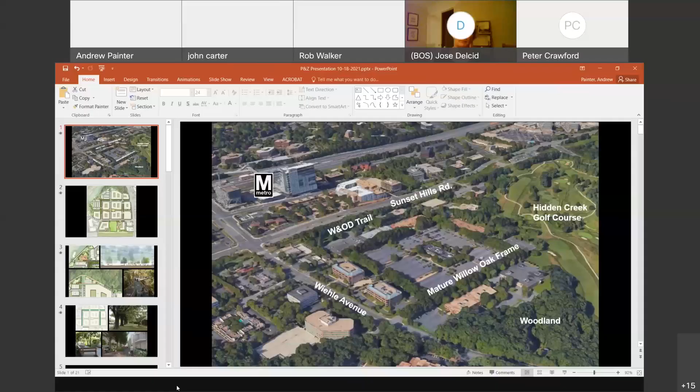Yes, okay, so I won't belabor the point, just sort of how we got to where we are - everyone knows that we went through rezoning back in 2019 for 32 acres of Isaac Newton Square, and the idea was to redevelop it with a series of 10 pedestrian-friendly development blocks, all in line with the comprehensive plan's recommendations. We only processed the rezoning and conceptual development plan with the ownership thinking at the time that we would eventually realize the conceptual vision over time as market conditions dictated.

With each block, you would get separate final development plans that would be filed for each block and building, and that would be reviewed by this body as well as the county.

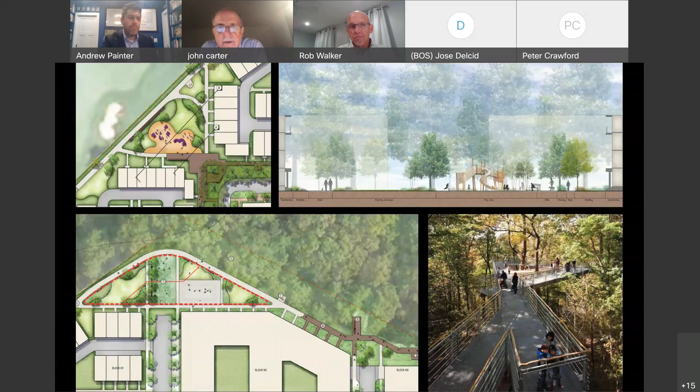When we first started designing out the neighborhood, we let the open space and the comprehensive plan's grid network guide the layout. It wasn't driven by buildings, it was really driven by open spaces. So you see the grid, the development blocks, the open space, and the idea really was how do you bring people together to socialize and interact?

How do you provide a framework around the preservation of those mature willow oak trees that are supposed to be preserved, and then provide opportunities for each block to have direct access to nature in a site today that is completely paved. So we have Nature's Edge Park, which goes around the upper part of the property.

We have the rain garden meander, which slices through the middle of it, meant to be a place for stormwater management. We have the athletic field at the bottom, and we also have a connection we worked out with Nova Parks and the Park Authority to punch through to the W&OD trail so people can get through to Metro Rail as well.

Tying all of this together was the idea of the Willow Oak Park, a variable width park activated with nodes of public art and furniture, and of course the preservation of the willow oaks. They are the defining feature of this development.

We've identified most of them for preservation on all of our landscape plans. In most places we are holding the existing building zone and curb line, and in some cases we're moving it away substantially, almost 8 feet in some cases, away from those willow oaks.

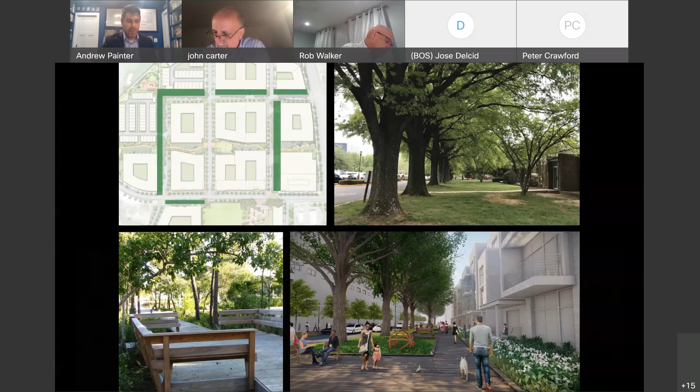As I'll mention in a second, the ownership has engaged a reputable arborist. They've been monitoring and maintaining those willow oaks for the last 2 years and stabilizing them. We have a series of proffers that seek the preservation of those trees.

Just for recollection, this is the tree preservation plan for the identification of the trees to be preserved from our rezoning and conceptual development plan. Some of you might remember that.

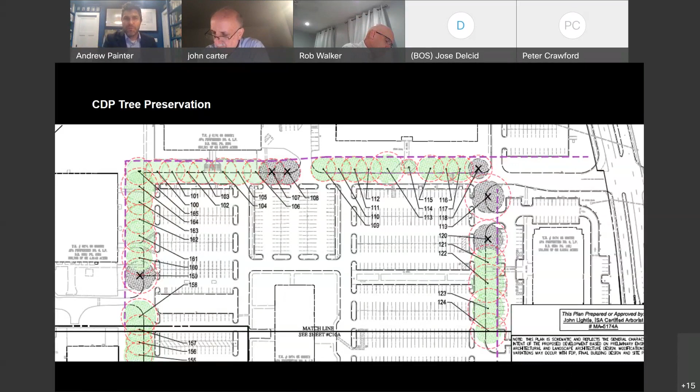When we looked at how we could move forward with the first phase of the project, we really wanted to do it in a way that would establish Isaac Newton Square as a place, as a neighborhood, not just a one-off block here or a couple homes. We wanted a catalyst project with a critical set of blocks to really create a semblance of place.

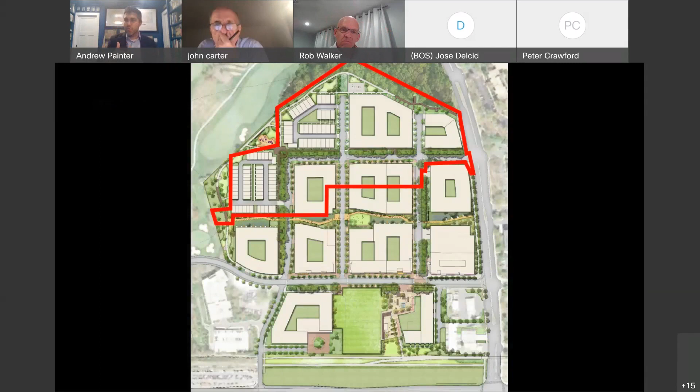And we determined that we would start at the top and then work our way down towards the Metro Rail. So we really focused on these 4 blocks, W2, N1, N2, and N3.

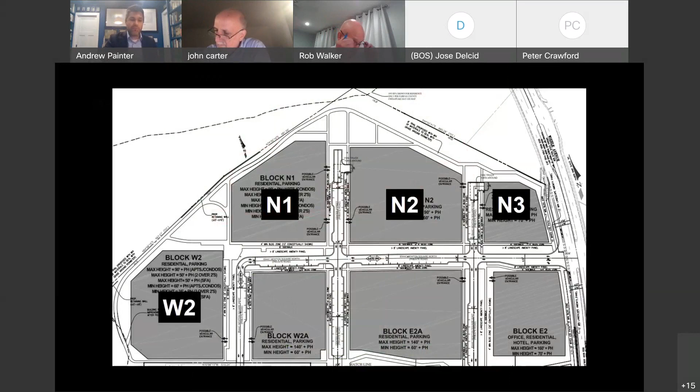But to ready those blocks for vertical construction, and to define those blocks and provide physical access to them, we realized that the private streets first had to be constructed and placed in common ownership. And then over time, vertical construction would occur in each of the blocks.

So what is before the committee this evening is an FDP to construct that first section of streets. No buildings are proposed. We are dealing with stormwater management, roads, and curbs. But these seemingly innocuous improvements are absolutely critical to accelerate the delivery of this neighborhood.

I will say that looks can be deceiving here. There's a lot to it. It's not just the roads, but it's critically important.

When we met with you last month and followed on with discussions with staff and Commissioner Carter, we realized there was some tweaking to do on the FDP drawings and in the conditions related to sidewalks and utility placement and more. I'll be the first to admit, and I wasn't here last month, but I will say this.

I think we did not anticipate the level of questioning at last month's P&Z meeting, especially because the utilities and that level of detail and scrutiny will be determined at time of site plan and not necessarily at the FDP level. That's really where it needs to be shown, in the site plan.

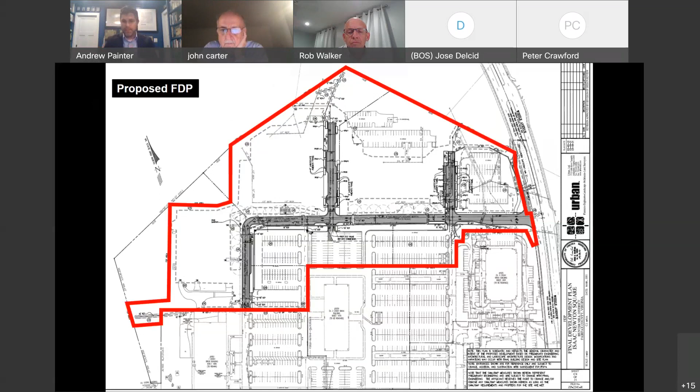But we do apologize. All the things that were brought up, they're in the works now. And frankly, some of the comments we received from this group really caused us to stop, pause, think, and rework our approach. So what I wanted to do is just highlight 3 additional points that Commissioner Carter had alluded to.

The first question, or one of the big things that came up last time, there may have been a misunderstanding about whether the proposed FDP aligns with the approved CDP, which was approved by both the Board of Supervisors and by this committee. So to confirm, the proposed road and infrastructure improvements shown here are consistent with what was shown on the approved CDP.

Those lines are coterminous. There is one small curb alignment, a small deviation in the curb return by Wiehle Avenue, but if you're looking for a deviation between the CDP and the proposed FDP, there really is none. We're also pulling back, and you can see it on the western side as you approach Isaac Newton Square West, on the left-hand side of the screen. We are pulling back almost 8 feet or so, the curb away from the existing curb line, which is shown in green.

Pete Crawford is our civil engineer with Urban. Pete, are you on the phone by any chance? I'm here, Andrew. Did I summarize that succinctly? Yes.

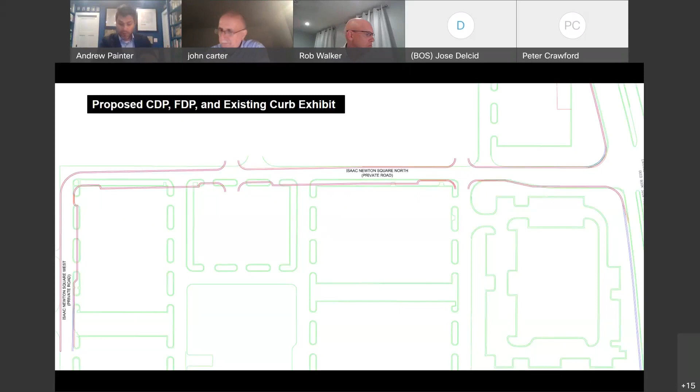Okay, thank you, Pete. The second point I wanted to talk about, and it's critically important, is tree preservation. Commissioner Carter had started talking about it, but as we mentioned, a significant feature of the rezoning plan, and a lot of justification for it, was based on the preservation of the mature willow oak trees and their inclusion in our landscaping and open space plans for future development. We all agree that the willow oaks are a major asset of the project, and they're important to take care of.

In fact, the ownership, Peter Lawrence Companies, actually developed those two office buildings along Wiehle Avenue, opposite the Taco Bell and the McDonald's, and they did not lose a single willow oak tree along Isaac Newton Square East, which is where my cursor is here. It's really for this reason that the rezoning included fairly lengthy commitments for the preservation of those, and we called them out on our CDP.

Since appearing before you last month, we've made some changes, and we wanted to provide some clarifying points. First, to confirm, we have, in fact, been working with an arborist, Care of Trees, which is affiliated with the Davey Tree Company, for the last two years. Davey has been monitoring and maintaining those willow oaks. They've been preparing those trees for construction to make sure they can weather it to the degree possible.

They've selectively pruned dead branches and used other techniques, and we're going to be working with them in the future to assess, using radar and other methods, their critical root zones. In terms of how we're going to preserve them, that's the level of detail we're working on. We know it will most certainly involve urban forestry and park authority staff, but that will also be addressed in greater detail at time of site plan. I wanted to let you know that we are taking that seriously and have engaged with the arborist.

The second thing we did was remove a note on sheet C17, which provided the authority for the applicant to remove trees almost indiscriminately. That's an offensive note, and it has been removed. The third thing we did was work with staff to craft two development conditions that Commissioner Carter had mentioned, one of which reiterates and carries forward the tree preservation commitments that we made in our proffers.

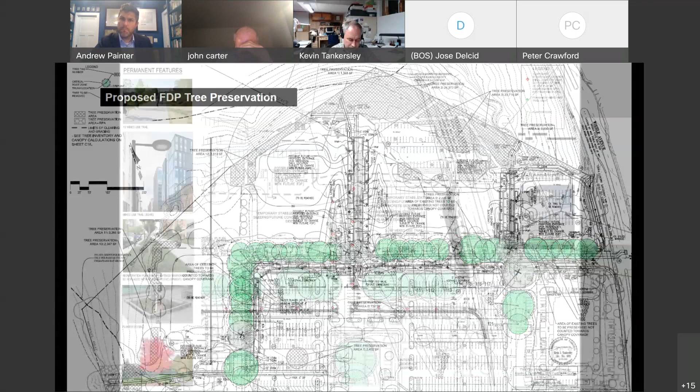In terms of some of the things that were looked at and are being done to minimize disturbance to the trees, for instance on the first segment from Wiehle Avenue to Isaac Newton Square East, we are going to leave in place the existing pavement and not have any disturbance there at the outset of work.

The next area, along Isaac Newton Square North between the east and center streets, we have pulled the limits back, down the slope. They're approximately 45 feet away from the trees. Next slide, Andrew, please.

Moving along from Center Street to Isaac Newton Square West, that's the area where, as I mentioned, we're pulling the curb away on the street side, which will open up more rooting area on that side. We do have a retaining wall on the north side of the trees, so the limits of clearing is only approximately 25 feet, but that retaining wall is containing the roots of those trees. They don't go any further than that, I'm pretty sure.

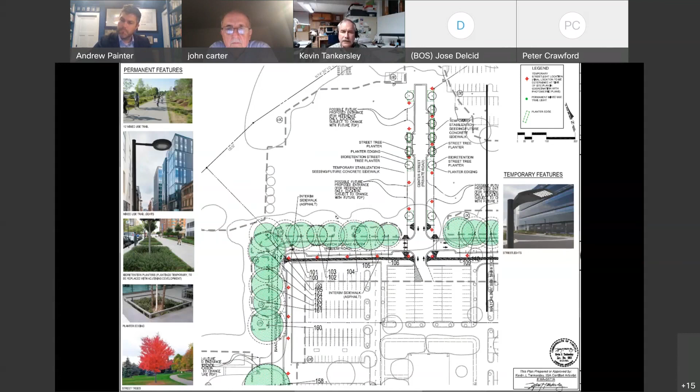And then along Isaac Newton Square West, we've also pushed the limits back to approximately 35 feet. Andrew, if we could have the next slide, please.

So we have a lot of work to do. We are getting into the nuts and bolts of preparing a tree preservation plan for the public improvement plan that will eventually be submitted. Our proffers require us to prepare that. It's going to have to be a very detailed plan because there is a lot here. This is a very complex project.

And in order to help with that, the applicant has brought on a second arborist, Carrie Halsey with Davey Tree, who also has significant experience, especially in dealing with mature trees like this in delicate situations. Davey is going to be doing some ground penetrating radar to help us trace the critical root zones better for the existing trees. We haven't gotten that work done yet, but that will help inform the plan and give us clues as to areas that we really need to pay extra special attention to.

In addition, we are continuing to work on care programs for these trees leading up to construction. This is stuff that will not be part of the actual construction plan because it's going to happen before then, to make sure these trees are in the best condition going into construction. A tree that's stressed doesn't survive construction very well, so we want to make sure these are in good health.

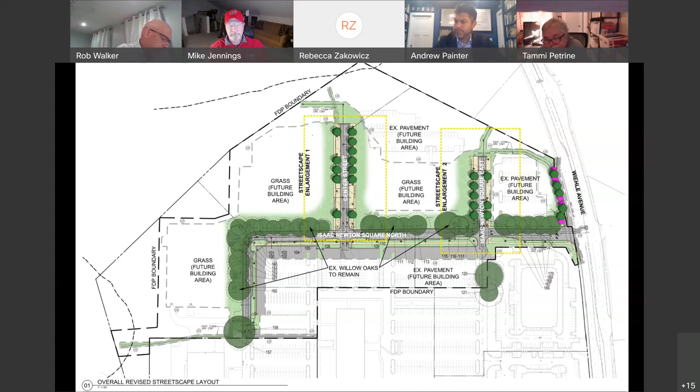Thank you, Mike. Michelle? I'm good too. Thank you very much for addressing our concerns.

Certainly. And then Matt. Thank you, everybody. Unfortunately, I couldn't make the meeting last month, so I didn't get to hear the initial discussion, but I thought the presentation tonight was extremely detailed, and it sounds like everybody's doing their due diligence to really acknowledge and protect these trees. So I have nothing further to add.

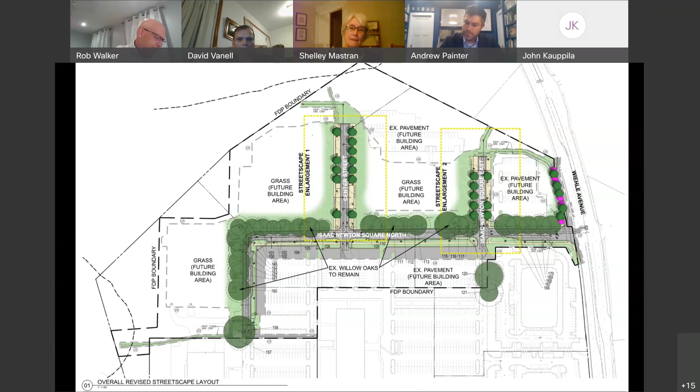Okay, thanks, Rob. A couple things. First of all, I'd like to second Mr. Pagay's suggestion for the roofing on these buildings when you get around to building them. It sounds like an excellent idea and energy efficient.

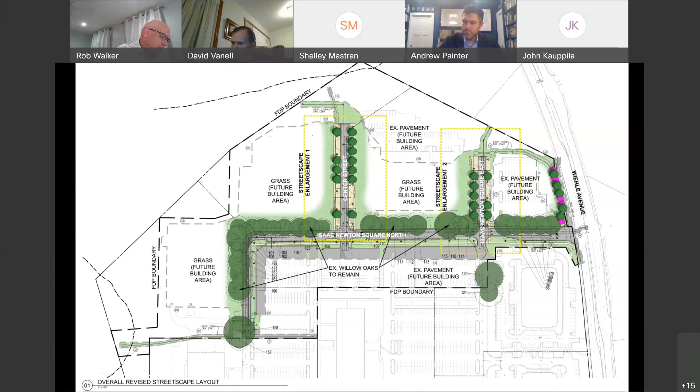What is your review for me again, the commitment for the recreational amenities? I know you have a sports field down in the bottom center of that. Dimensions of that are what? You know, I have to take a look at those proffers again, but it's a full-size adult athletic field.

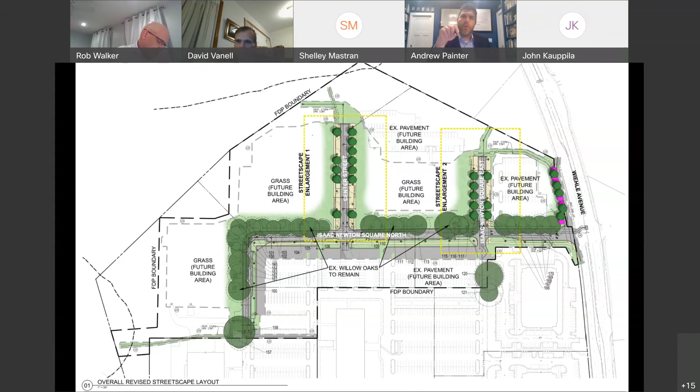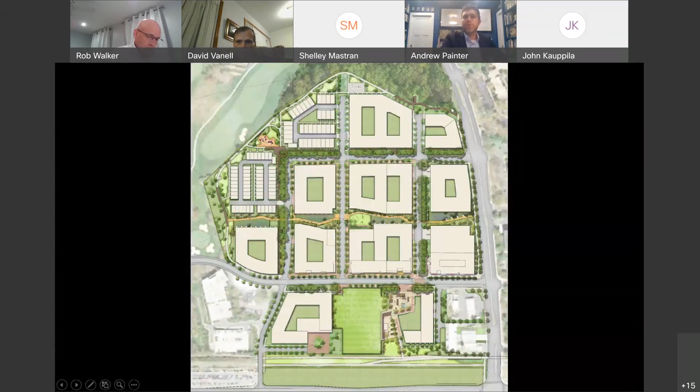Okay, and then you've got some amenities up at the very peak of the site. We do, yeah. So the main amenities that are up at the top, if you're living in this northern part, one is going to be the Nature's Edge Park, which is in this area, wrapped around this whole area. That'll be pathways, floating decks, that sort of thing. In this area here, there's going to be a small tot lot, playground, that sort of thing. We purposely located it here to take advantage of the views of Hidden Creek Golf Course.

And then in the northern part here, we've got an option for sort of a small court or dog walk area. And then you can see the Willow Oak Park here, around the vicinity of the site. Midway through the site, slashing through these blocks, is what we are calling the rain garden meander. The idea is that the buildings on those would direct some of their storm water into that area, and that can be an educational type facility.

And then down at the very bottom, this is where we don't have much retail on the site, but this is where we're hoping to have retail and some commercial uses, sort of Main Street Village kind of feel. This is where we've located the full-size athletic field, with a warm-up field to the west of it, and it's got bathrooms, sort of amphitheater seating, and a main plaza area along here. There's a pavilion, and in the meander there's also a little community grass green area.

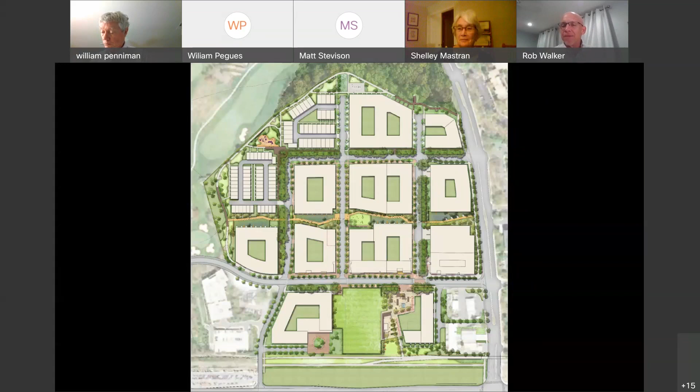Okay, so that's unanimous except for me, as I'm abstaining. So that motion carries. Congratulations to the applicant. Thank you again for working with Commissioner Carter and working with us. We really appreciate your efforts and your team's efforts. This has always been an exciting project for the community, the way it's being preserved, the tree save. We all want this to be a success, and I think you've all proved tonight you feel the same way. You always have, quite frankly, but we really look forward to it.

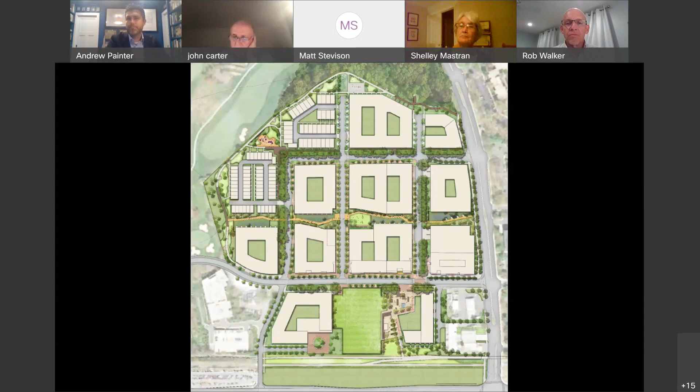Thanks, Rob, and thank you all. How many people voted, Rob? I'm just curious. Let's see, 1, 2, 3, 4, 5, 6. So we have 11 voted for approval and 1 abstained. Thank you.

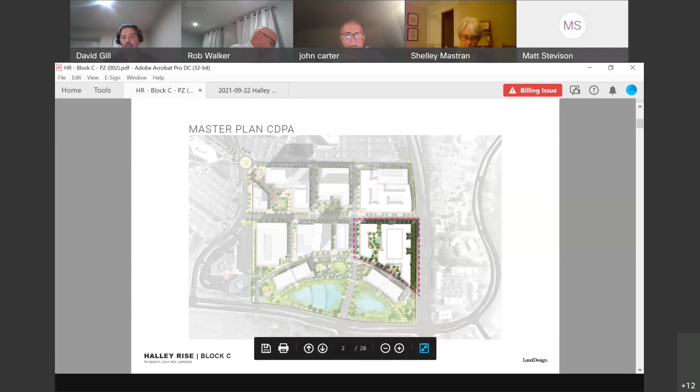To the south would be the existing Fannie Mae office building. East is Reston Parkway. To the north is where the Wegmans that is currently under construction and nearing completion is at right now. Just zooming in again, we were talking about two buildings, two residential buildings, and we'll go through that as we show it to you.

The key to it was that we had brought the existing office, the existing parking structure that was designed to serve the office off-site, into the building itself and fully wrapped it. That's a pretty significant change from where we were with the CDP and committed to this design with the FDP.

This building on the east is intended to be a rental building. Right now, we're anticipating this building would be ownership on the west, but you never know how the market actually turns out in 2 years from now.

I'd also point out here to the west of that, this building here is the CLT office building. I think Commissioner Carter wanted me to highlight that last time. That is actually a building which is called cross-laminated timber, a wooden structure for an office building.

The big advantages of a CLT building is that it allows for better carbon sequestration because it's actually captured in the wood rather than the carbon that you need to make steel or concrete. Estimates, and Bill Penniman probably knows this better than me, are that construction alone is responsible for 10% of carbon emissions worldwide. So the ability under the new building codes to do CLT buildings above 4 stories is a really exciting improvement. It's a credit to Brookfield that they're willing to commit to do that for that office building. I think that's a green feature that you asked me to touch a little bit on, Commissioner Carter.

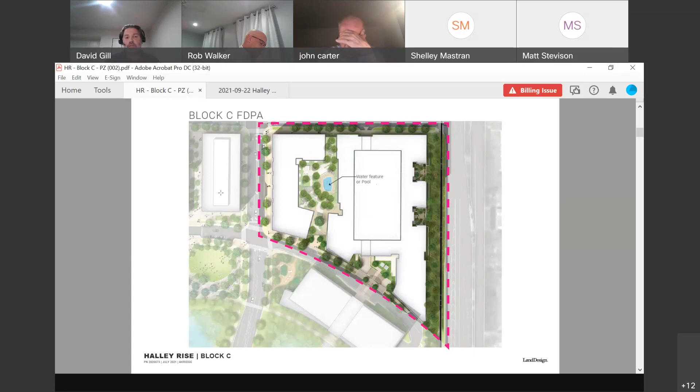Just going through it a little bit more, we had a couple of questions here about the pictures here, I think you raised that, Tammy. Talking with our landscape architect, these represent 3 to 5 years after planting. All of the trees planted will be either 3 to 5 inches in caliper when planted, and as shown here, they're 3 to 5 inches. In the plan itself, they are shown with the 10-year canopy as required by the ordinance, but I want to make sure everyone understood what the graphics were when they were looking at this.

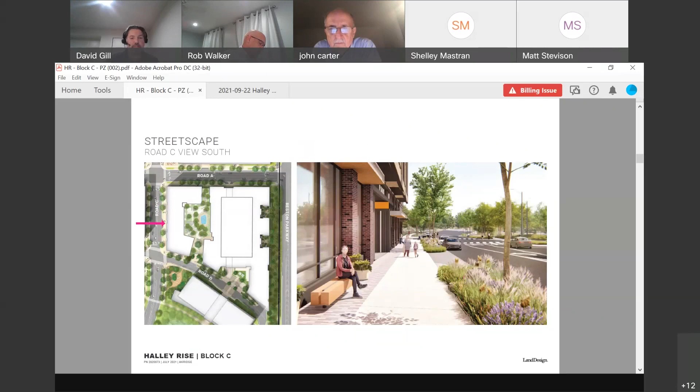This again shows different street views. I'm happy to spend any amount of time on these different views, but none of these have changed from the last time we presented to you. This is looking from the park northeast.

So Wegmans would be in the far background here. And we've got more detail on some of the surrounding parks. I think it was a question we had heard is where are the parks in relation to these residences? I've got some slides further on to talk specifically about those.

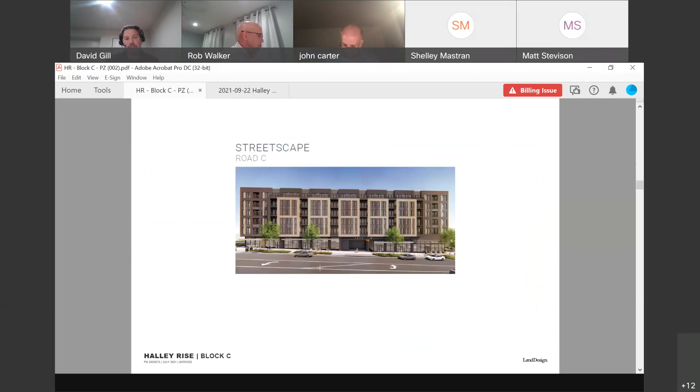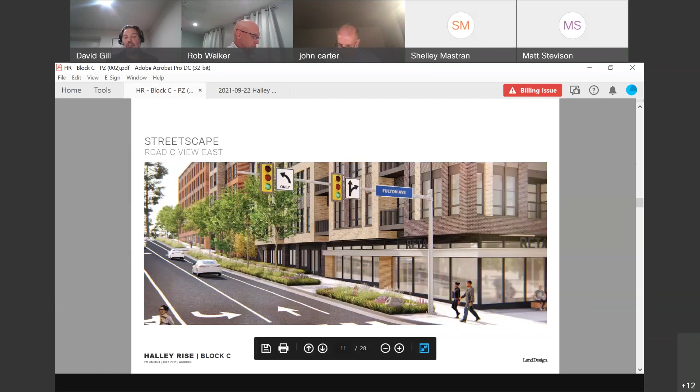Again, how the frontages work, how it works with the street as it goes down with the grade. Up to the left-hand side of the picture is Reston Parkway, and it would fall down almost 2 stories, 20 feet as you come down to this corner. Wegmans would be across the street in this location, but again, we're anchoring with retail, trying to activate this street frontage as much as possible and make it as pedestrian friendly.

One of the questions we had heard was the type and species of trees. The proffer commits us to use native species to the maximum extent practicable, and we're absolutely supportive of that. I don't think we can commit to 100% native just because there are some better climate adapted non-native species, but we're 100% committed to trying to use natives where we can, and absolutely no invasive species. We are not anticipating river birch here, I think there was a question about that, largely because our understanding is that doesn't comply with some of the Reston streetscape standards, and working with our landscape architect, that's what we've been targeting here.

I'd also use this chance to talk a little bit about the raised plaza that's basically a story up between the 2 residential buildings. There were a couple questions about the amount of green roof we're talking about. Working back through our team, it looks like we could commit to about 4,000 square feet, or 15% of that, as green roof, and we're excited about that. That goes above and beyond any commitments in the proffers currently, or that were frankly done on the FDPs for the other blocks. So we're excited about being able to make that commitment. We really sharpened our pencils to see what we could do with that area.

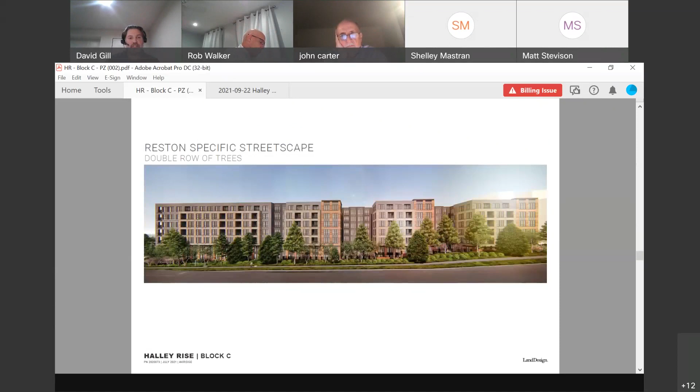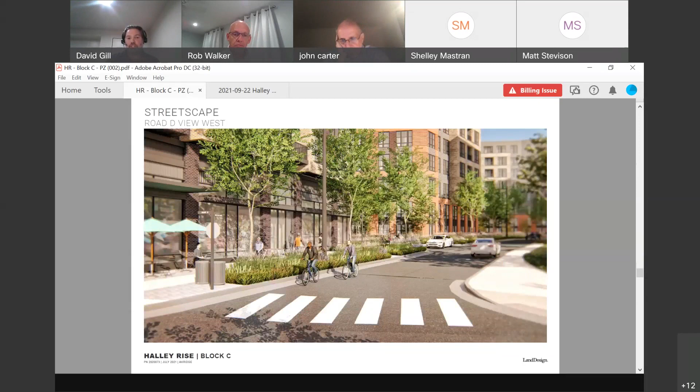On the interior here on Road D shows the time and effort on how to make this entrance into the garage work to make it more pedestrian friendly. We have a shared loading space right here near the entrance to one of the two residential buildings, as well as to the office buildings further. This shows that courtyard where you do that turnaround movement here on Road D.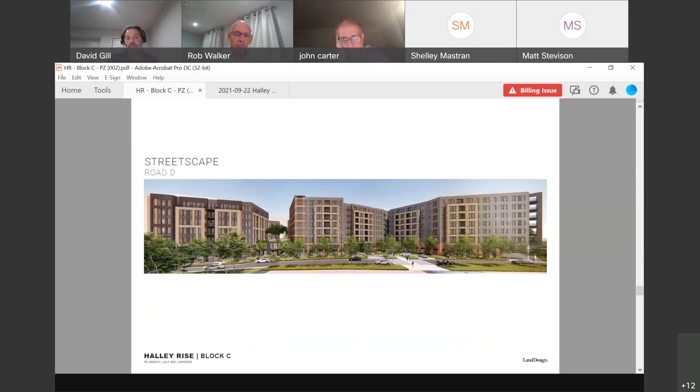This is the larger streetscape step back. Again, on the left is what was approved with the CDP FDP and where the parking garage was shown, and on the right is the changes that we're proposing with our implementation of it. Again, the density, use, FAR, none of that is changing with this application. It is the implementation exercise of what was already approved with the CDP FDP.

We had several questions about how the parks work, so we went back with Brookfield and they wanted to give us the update. Directly across the street, to the south and west of the existing Fannie Mae building, would be a Halley Rise dog park. So our residents will be able to come down, walk across the street, use this dog park, and then walk over and across. Both of these open spaces are under construction now and will definitely be open before our buildings are complete.

This is the center master open space lawn area, multi-use, picnics, throwing the frisbee, things like that. To the south, I think this was a question we'd heard, is where can the kids go play? That would be this play area right here, where we've got a variety of play structures to appeal to a variety of ages. And then directly to the north of that is the volleyball and active recreational component as well.

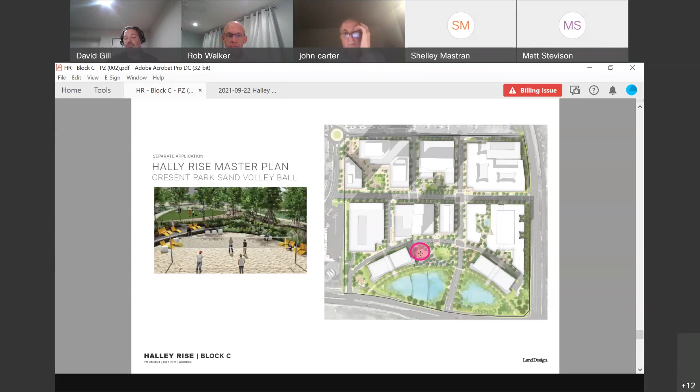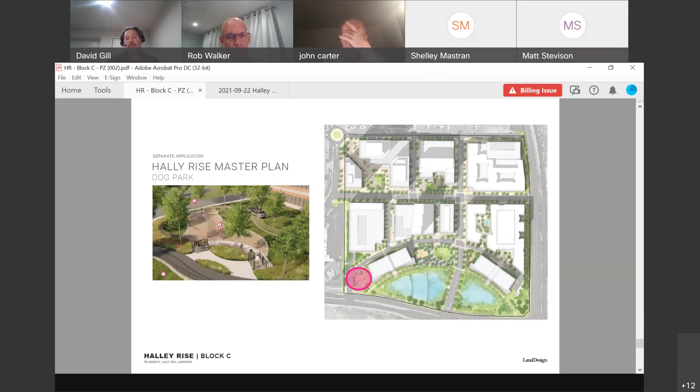And even further west, there is a second dog park that our residents will be able to use as well, to really address some of those open space questions. So that's just a review of where we're at.

There were a couple other specific questions I want to touch on. Bill, you had questions on EV and how we're tackling that. The proffer itself only called for providing 2% of spaces as EV-ready. We heard you loud and clear, and I think even since the proffers were initially approved, the EV market has matured even more substantially. So we actually want to put in at least those 2% of units, and frankly, a few more.

2%, strictly speaking, would only be 17 EV spaces. That didn't really work out with how the bays lay out, so we're committing to a full 20 spaces as EV, not even EV-ready, EV straight up. In addition, we're going to try to incorporate additional conduit for future expansion of those parking spaces, if and when the demand requires it. So we're excited about that, and excited about appealing to those type of residents.

Jay, correct me if I'm wrong, but my understanding is we're not assigning these spaces to any particular unit. They'll be open so anybody who lives in the community can charge their EV vehicle. That's correct, yes.

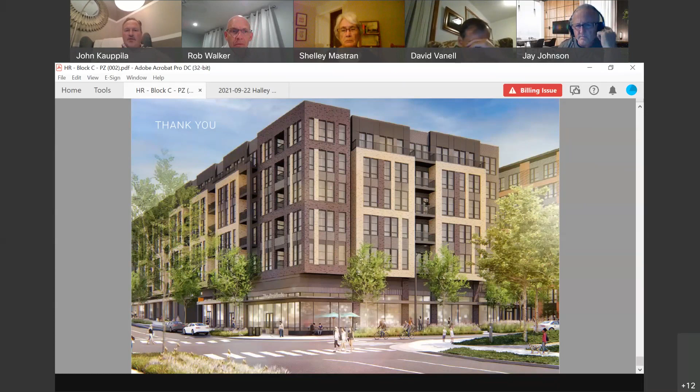Thank you, Shelley. John Kauppila. Hello, thanks David for the presentation. I still have a little bit of concern about any trees they plant along Reston Parkway. I don't know, maybe I missed it, but I haven't seen anything that addresses that. Definitely want to avoid planting the quarter-inch caliper trees that were done on some of the projects along Reston Parkway.

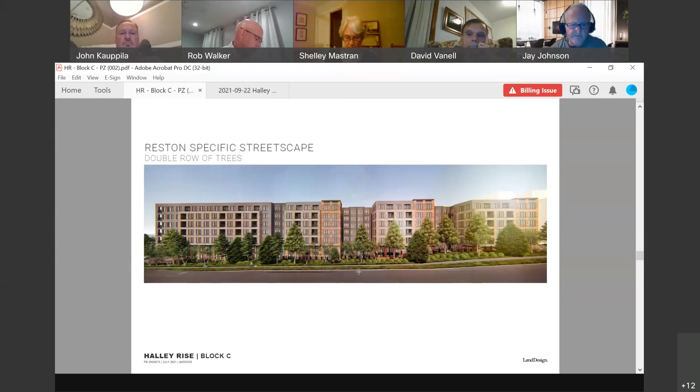Yeah Rob, if I heard the question correctly, it was about the trees on the parkway. Yes, sir. And yeah, we spent a lot of time—David can jump in here too with additional color. There was a rather prescriptive two or three tree pattern along Reston Parkway. We actually had a gas line that at one time was going to be located west of that trail you see. It was causing so much trouble with the proffered treescape along the parkway that the line was moved internal to the site, at considerable cost, onto the north-south spine road west of Road A. I'll say it complies completely with the CDP required plantings.

There's additional lower ground-story plantings that have been added to supplement that. David, you want to add anything? I just know the staff is well pleased with what we've done, and actually we've taken extra steps to make it a little nicer, for lack of a better word.

Yeah, and Pete Crawford, if you're available as well—Pete serves as the engineer for this project and can add additional color on the time and effort that went into making sure what we're presenting not only matches what was done at the Wegmans to the north, but improves on it in some ways. I think one of the things staff wanted to see was making sure we don't have just standalone trees, and that the understory really works with the treescape presented. So that's where a lot of our focus was, John—to make it more natural, more of a true Reston look, rather than fields of grass with individual trees.

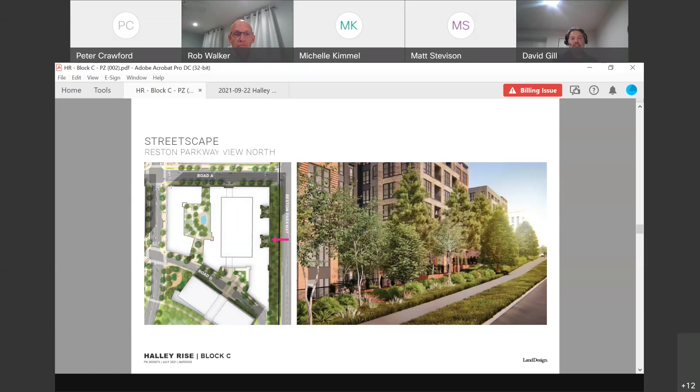I will say, Michelle, I think one of the reasons we did spend a long time trying to activate the north side of our building as much as we could was so that folks, if they do make that move, would come down our frontage and into the site. Because if you go down Road A, you end up at Metro, and if you come down Road A and immediately go here, you end up at the Wegmans. We wanted to discourage having to cross Road A at this location. But we hear you on the point.

Yeah, and it's not just the folks in your building, it's all of South Reston. I'm still concerned, especially—I recognize that it might not appear to be an issue right now, but as this comes on board and there's more cars going in and out and potentially more foot traffic too, it just seems concerning that there would be a conflict. How do you handle that?

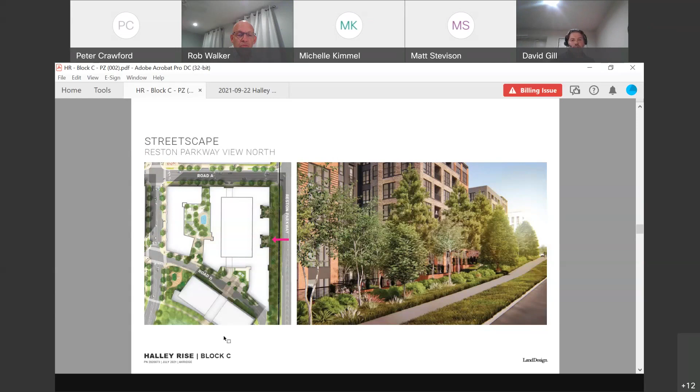Let me jump in here, David, because I think there was a bit of confusion on the presentation. Directly south of Block C is actually a fitness park. Apologies—the dog park is on the west side, just to the west of the existing office. Yep, that's the dog park, and then the one that was previously highlighted is a fitness park. Both of those are actually built right now, so anybody can go out there and check it out and see what's going on.

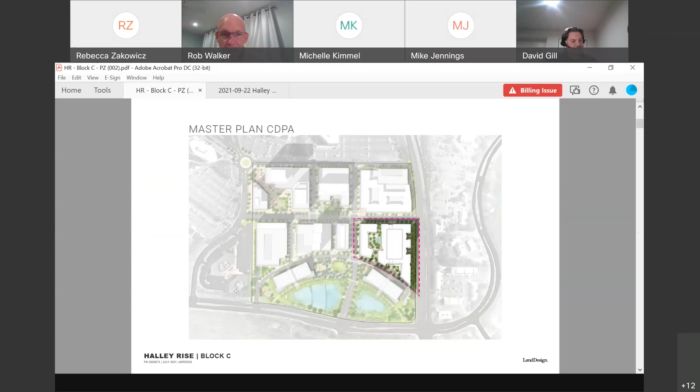Okay, so one comment, I couldn't quite figure out why you were talking about the timber building when it's not your project, but since you did, I will now mention that I saw a project that is 18-story timber construction for your future edification.

No, that's a great point, Tammi, because I think they changed the building code in 2021 specifically. Yeah, well, this isn't necessarily in this country, but that timber construction is taking off around the world.

Anyway, to the photos, a couple comments. Sometimes a 3 caliper tree can be better than a 5 or 6 caliper tree in that it grows faster. However, having said that, I'm not too thrilled with the graphics that show tall trees that are at least 4 stories, which means they're 40 feet tall in a 10-year period. That scares me a little, because are those pin oaks? We want trees that are going to last a long time. Not that I hate pin oaks, but they're fast growing and they don't live a really long time.

How many, let's see, when are you planning to build? So when are you planning to break ground? Right, roughly a year from today. Okay, so fall of 22. Correct. Okay.

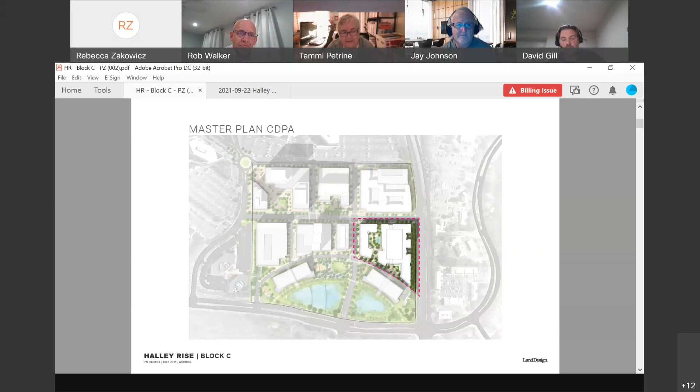Sure, Jay, do you want to jump in, or do you want me to? I'll be glad to chat about that. First let me back up, Tammi, good questions. The central amenity between the West Tower and the East Tower is actually shared, so there's a green area. There will be some private spaces to the west if the West Tower goes ownership.

So let's make sure we're clear that that is a mutually accessible amenity for all residents, whether it's ownership or rental. The ordinance currently allows the for-sale workforce units to be located in the rental community. That is the ordinance, and David, correct me if I'm wrong, we've done that on several projects. I don't know exactly how we'll work it out on this particular project. If we want a different distribution of ownership units in the West Tower that are in the affordable range, that's not my call. But I believe that's perfectly acceptable by ordinance to distribute those units in the rental. So I'm 99% sure that's correct.

And importantly, we're delivering that building first as well. So all the affordable units will be delivered first because we're delivering that building first, correct? That's correct.

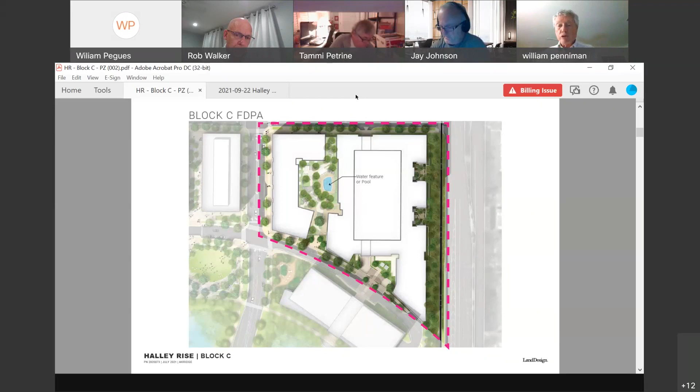Go ahead. No, it's a great point, Bill. It's something we're going to take a pretty hard look at, especially whether it's the roof or the parking structure itself. We're just not sure yet, but we're taking a pretty hard look at it.

And you may be able to find somebody who will do it basically for free. In other words, the electricity saved, they will use as the means of paying for the upfront construction. That's certainly done on a lot of buildings these days. The county has a program for that for its new buildings and its existing buildings, and essentially no upfront money on your part. So think about that, and I'd be happy to talk to you further if I can be of any use.

And then the last thing, I had a question about you referred to a wood structure building. Is that one of your buildings, or is that something nearby? No, that's Commissioner Carter had asked about it at the previous meeting, and that is this office building, 100,000 square feet adjacent, and that has already gone through FDP. It's going to start construction soon, and I think Commissioner Carter wanted me to highlight that as also part of the things Brookfield's looking at overall.

Okay, well, you want to redesign your building and do that? That would be a great idea. Okay, I think those are my only questions at this point. Thank you.

Thanks, Bill. Yeah, I think most of my questions had been answered by the presentation to date. I do want to just go back to some of the really good things about this plan. The articulation along Reston Parkway, I think, was a real plus from where the CDP was, and where the FDP now shows a couple of bump outs and really helps to minimize or lessen the abruptness of that edge along Reston Parkway. I think is a good thing.

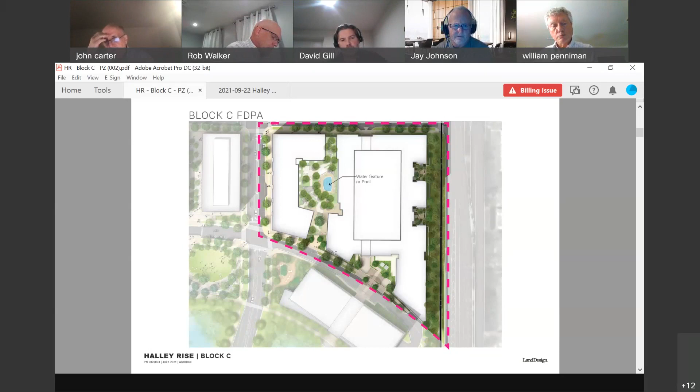You've got public streets all around this except for the southern streets. Don't you think, since you moved that gas line, you can put some trees between the sidewalk and the curb there? I think that would help. There's something wrong with that drawing, you don't see the depth of it, and putting a few trees in there, I think we should look at that. I know DOT makes it hard on you.

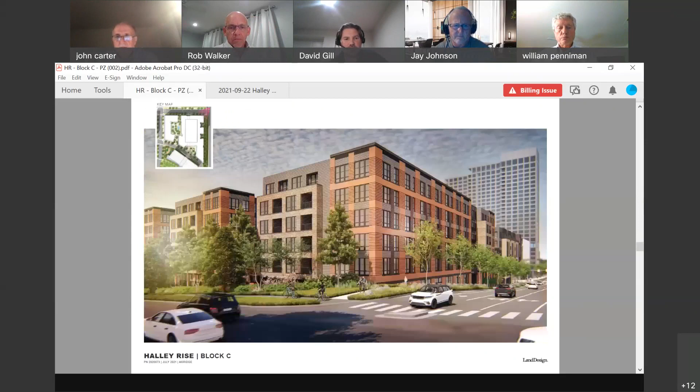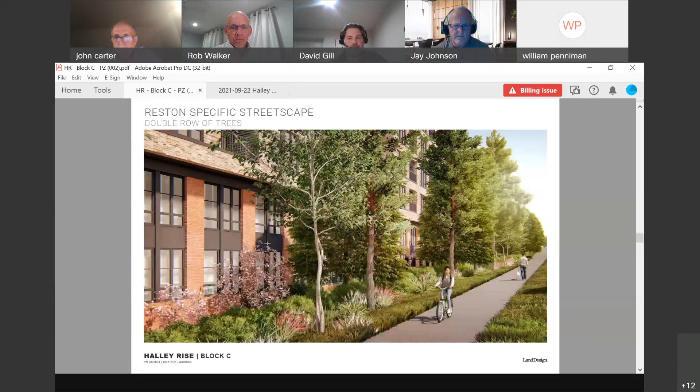Are you talking about the southern frontage here? This frontage, is this the one you're talking about? No, the one on Reston Parkway. Oh yes, sorry, so the double trees one. Seems like you ought to look at that.

Then we're developing a whole set of details to get people to the metro station. So you've got very little on-street parking. We don't want any of those depressed boxes where you have on-street parking, preferably none in the whole thing. That is really a mistake that we're doing in other places in Fairfax County, and we made a fuss about not doing that anymore in Reston. We never really started to do that in Reston.

The double ramps at the corners, straight curbs, separation between the planting boxes so that you can actually get to the front door. Since these are public streets, you're hampered by what you can do with the street lights, but make sure you start at the corners.

I think, given the size of this project and the WDUs, there is no ordinance for the WDUs, it's a policy. And yes, you're correct, you can do it that way, putting all the units in one building. We haven't been doing that in Reston. So we would like a proportional amount in each building, and then even within the building, we would like them scattered.

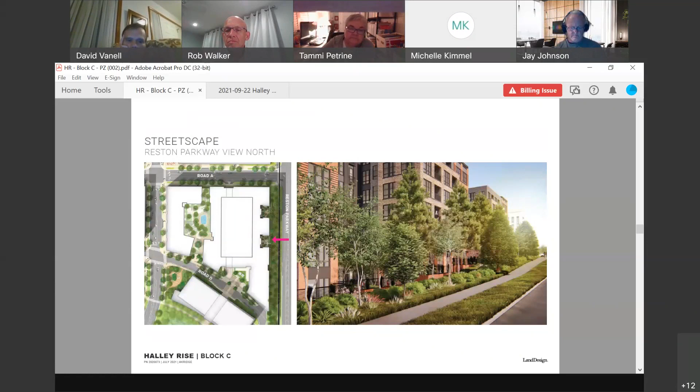Yeah, I just wanted to bring up one comment and question though, because David, you had mentioned that you're really trying to make sure that people can live, work, and play. That is also going to school. So where would the school buses pick up for kids, and what type of a safe bus route and safe walking plan to get to schools? Which school zone would the children of these units be in?

Let me verify that with Mark in terms of it, but these very likely are in the South Lakes Pyramid. I just don't know if they're Rachel Carson or Langston for the middle and which elementary it is.

You raise a great question about the school bus. I think it would be dependent on when these come online relative to the residential building to the north, and how they would work together with them and the schools on how you would load in the way that's the safest, that makes sense for residents of both buildings. Let me get with Mark Looney, who represents Brookfield and the larger developer, and see if that question hasn't already been answered at the CDP level that I'm just not aware of right now.

Okay, thank you. And then just again, I mean, I know children who go to my son's elementary school who live at some of the new apartments near the metro. So I think we have to plan for children. And yes, that was one point that I talked about last time, and just not having enough space for them on site.

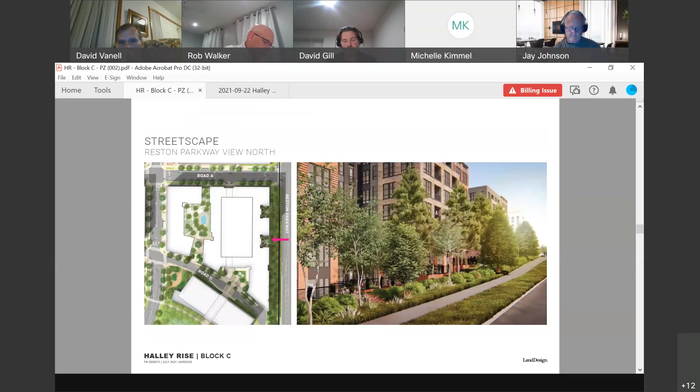Thank you, Michelle. Tammi. Thank you. I do want to compliment this project on going to all electric and making some positive changes.

But in that we have so many questions that are not able to be answered tonight, I make a motion we defer the vote on this until there is one more meeting before you go to the PC, that you come back with the answers and the clarifications. I think there's just too much we don't know. I would not be able to vote for this given, and I would like to. I think the Wegmans, we would like you to too. So it's wonderful, but I just don't think we have enough solid information, and I think improvements can be made that will give us more comfort. Thank you. I make a motion that we defer.

Okay, thanks, Tammi. So we're not quite ready for motions yet, but I just wanted to confirm there was nobody from the public that needed to speak, so I have to check the chat.

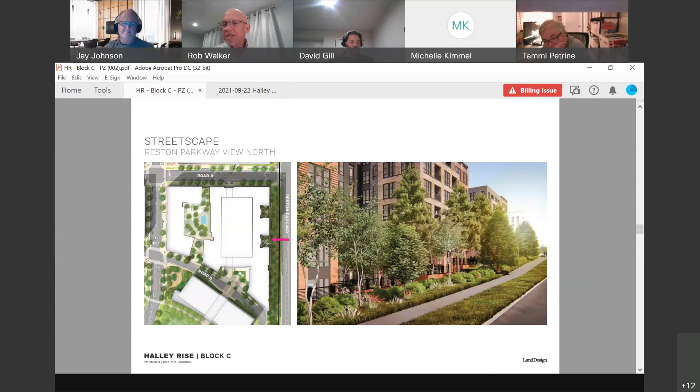Rob, can I make one brief comment? Jay, I wanted to give you and David both a chance, after you've heard all these comments, to have a say, and then we'll open up for motions. David, can you go to the last slide that shows the approved CDP and where we're headed?

I really do appreciate the commentary. A lot of these questions are good. They raise our consciousness to a level of detail, and we appreciate it. I think the biggest point I'd like to make is we're not perfect. We are, as most developers, collapsing a set of competitive issues.

Cost escalation has been absolutely crazy. We're trying to underwrite where we think we'll be at the time of construction. Rents have actually gone a little flat. That's been tough. We'd love to commit to certain things early. Sometimes we can't, sometimes we can.

The green provisions are super important. I think we're all mired in our own past experiences with less successful ventures with sedum and green roofs on wood frame structures.

Having said all that, I do think we would really appreciate you all taking stock in what could have been, which would have been a subpar, really poor use of this property, with what was approved versus where we are. And Tammi, I see you looking at you - we are in a much, much better place. We will make it better, and we have heard your commentary.